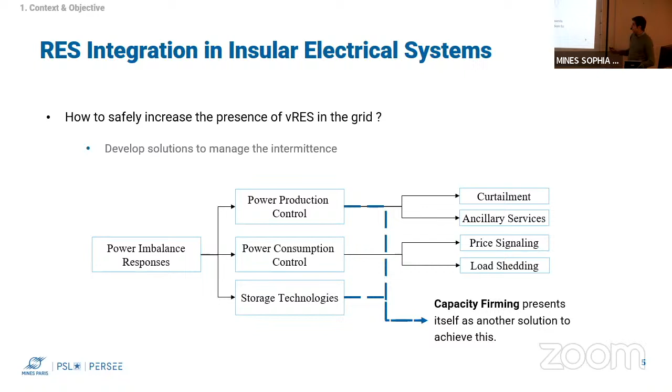One specific solution of interest in this work is a combination between power production control and storage technologies, which is capacity firming. Capacity firming is when we demand from a RES source a guaranteed power injection for specific periods of time.

And to do that, what classically is done is to use energy storage systems. When we talk about energy storage systems for capacity firming, what we saw is that lithium-ion technologies are particularly well adapted to this application, as they have a very fast response that can work well with the intermittence of renewable sources. It is easy to scale up or down to meet the specific physical configuration of the power plant on site. And also its pricing has been decreasing steadily and is expected to continue to decrease in the future.

So what this has done is that in capacity firming solutions, the lithium-ion based energy storage system have become the common choice to satisfy the energy storage needs of these sites.

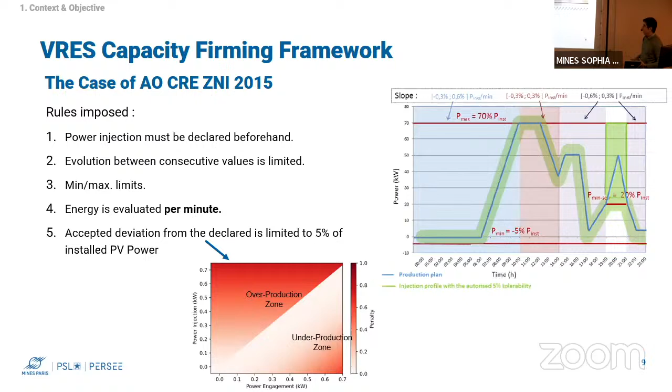And so we see that this capacity framework is a complex system, and this complex system needs to be approached in a coordinated manner to offer a system that is fully functional and that answers the needs of this capacity framework. So we can distinguish different steps that need to be considered when answering to a capacity framework.

Which are: we need to consider solar forecasting, we need to also be able to model the system and the behavior of the different production systems, we need to be able to generate the engagement that the central power has to make, and afterwards we also need to make sure that we operate the system in a manner that is coherent with the declaration done before, so we can optimize the operation.

And we see that in each one of these steps that needs to be taken into account, there are technical challenges that can be addressed and that can help optimize and improve the general behavior of the system. Particularly in this work, what we focused on was the modeling of the energy storage system. And afterwards, what we focused on after the modeling was the impact these models had on both the optimal engagement and the optimal operation of the plants operating under this capacity framework.

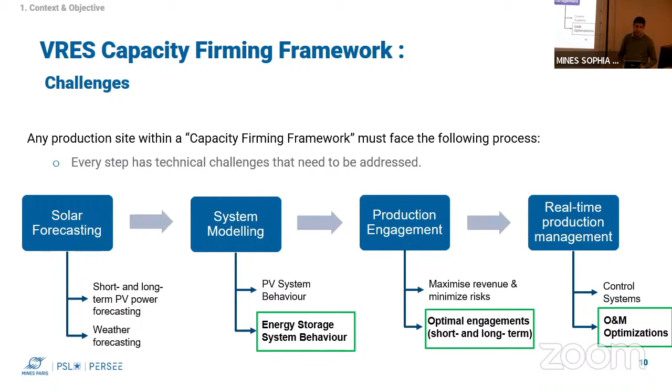So when we focus on the energy storage system behavior, what we saw in the literature was that there were no real models and data focused on industrial environments, and that mostly all the models were developed on laboratory conditions. Secondly, these models and approaches that were available are most often done for single battery cells and battery packs with small capacities. And the case of whole systems and large scale capacities is not fully addressed in the literature.

And at last, another point that was noted was that there is no real knowledge and information on how a specific power application will impact the behavior and performance of the BESS over time. So having this in mind, we proposed an objective to develop a BESS model that was compliant with industrial constraints and that allows the optimization of storage operation for photovoltaic capacity frameworks.

Here, when we talk about the industrial constraints, what we mean is that there's an environment of data scarcity when there is no laboratory testing done, and that the measurements are very dependent on the specific BESS manufacturer and the data that is available, and also that the models need to be compliant with the embedded systems and the needs of industrial sites, so it can be easily adapted and introduced in such systems.

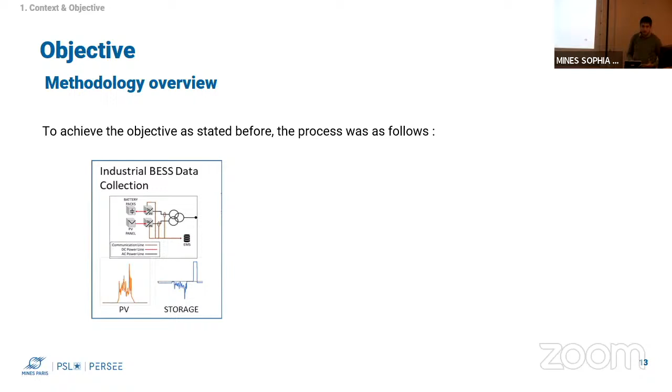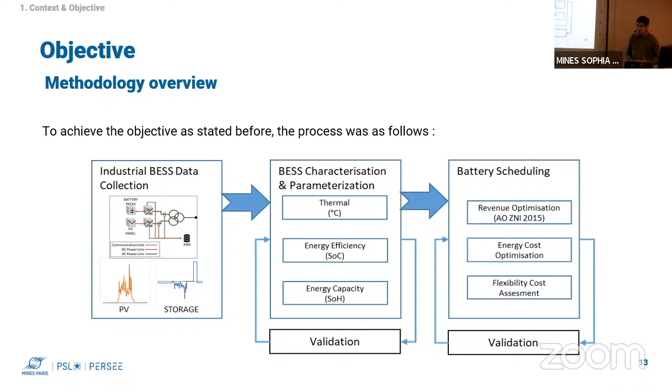To achieve this objective, the methodology followed here was to build several industrial BESS data system collections. Afterwards, with the data collected, we developed a model that estimates several internal states. And with the internal states and the model done, we applied such models in battery scheduling applications, and in particular in optimization frameworks to determine the best usage of the energy storage.

So now let me present the experimental industrial sites that we worked upon. In this work, we built 5 hybrid PV power plants that were developed under the capacity firming framework that I presented just before. This started with one proof of concept site in the SPIE facility in continental France.

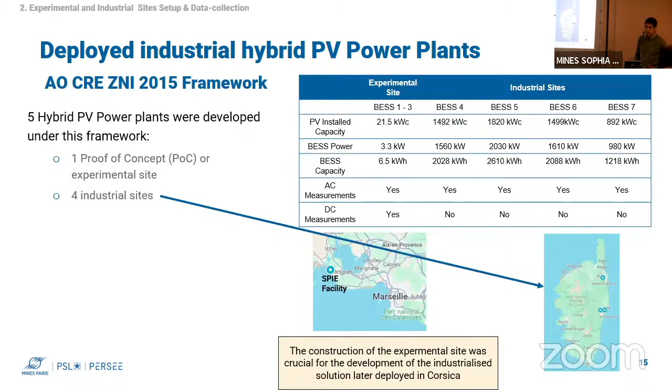Once the site was built and the operation was validated, an industrialization of the system was done and deployed in the island of Corsica for our client. What we obtained from these sites at the end were seven BESS that were in operation, from which we can distinguish two different kinds of measurements and two different types of BESS.

The type from the experimental site, which is more open in the data available of the battery, and the type seen on the industrial sites, which was a more closed environment and for which measurements are hard to obtain.

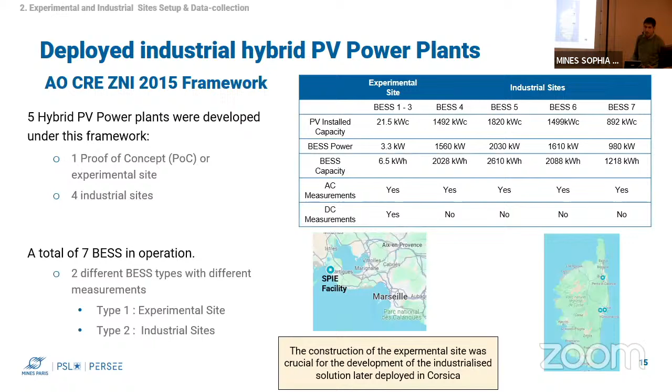When we focus also on the specific behavior that the energy storage system has, we saw that when operating under this capacity firming framework, the energy storage has a very specific type of charge and discharge profile. Given the rules of operation, the energy storage is mostly charged during the day when there's photovoltaic overproduction, and then it is discharged in an almost constant way between 7 p.m. and 9 p.m.

So what this does is that the system will have a very recurrent charge and discharge profile that will be charged during the day and discharged during the night, every day, during the whole life of the project. So we see that the BESS will always experience the same type of profile.

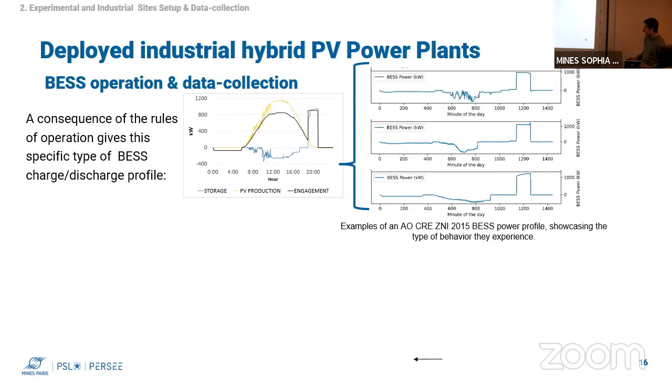The data that we collected from this BESS was heterogeneous from site to site, given that there was often data loss due to malfunctions, and the acquisition systems that are deployed are less reliable in gathering all the information and saving it for later use.

What we obtained was 1.5 years of data from the BESS from the 5 sites, in which we collected the behavior and the different data that was available.

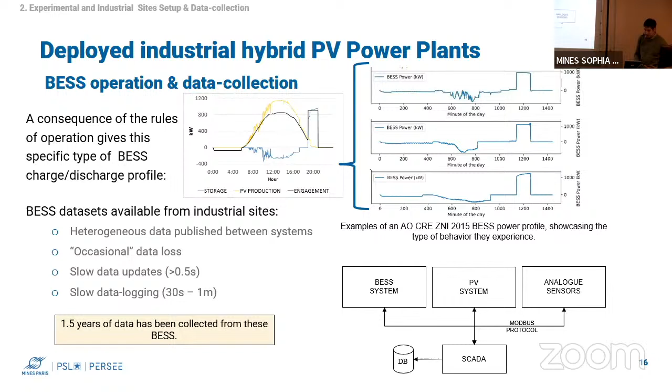Focusing also on the observability that we had on the BESS, the two BESS types have different real-time values that can be exploited. The experimental site offers AC measurements, DC measurements, and internal temperature, in addition to indicators of state of charge and state of health. However, the industrial site only offered AC power and state of charge and state of health.

So that was a difference in data. However, what we saw also is that for both systems, the manufacturer provides characteristics of the energy capacity available at the beginning of life and the charge and discharge efficiency coefficients, which in general is what we consider the manufacturer-issued model, as this information is what's used in pre-project development and study phases.

Another interesting detail was that the capacity retention of the different BESS can be guaranteed by the manufacturer, but it's also not a standard, not a requirement. So what we found is that the industrial site did have a warranty, but the experimental site did not have any reference value for capacity over time.

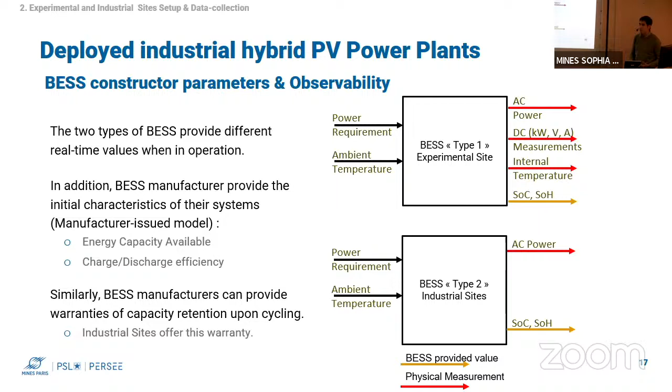After gaining a notion of the data we were able to collect, we focused on battery model development. Here the objective was to develop a BESS model that answers the needs of photovoltaic capacity firming sites, and that is able to be integrated into the energy management system and the power management system.

Here, we found several questions about the impact that temperature can have on battery performance, and how models developed for single cells and battery packs can be adapted and used on large-scale systems that are data scarce and lack a lot of information on their behavior.

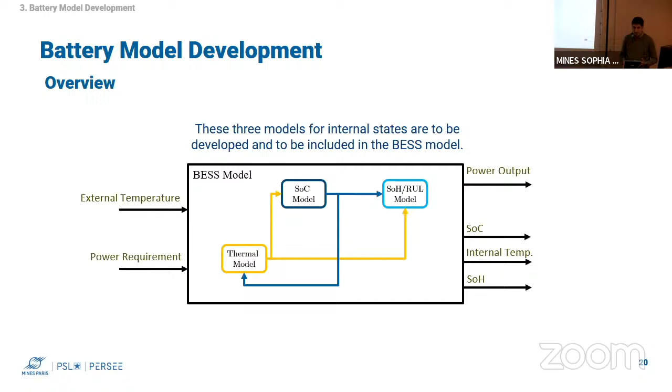So what we wanted to do for this was create a BESS model that estimated 3 internal states: the thermal model, the state of charge, and the state of health. By determining each one of these, we could have a BESS model that showed the interdependence of the elements. Starting with the thermal model development, the first thing we did was observe the thermal behavior that the storage had when operating under the capacity firming framework of interest.

What we saw is that the temperature of the BESS showed 5 different zones of temperature reactions. The first observation is that at the beginning of the day there's a temperature decrease that is linked to the heat exchange with the environment.

Afterwards, during the middle of the day, we see an increase in temperature related to the increase in ambient temperature, the exchange with the environment, and the fact that the batteries start to be charged. After that, at night, we start the moment of a strong discharge, so what we see is an increase in temperature. We also see a small decrease in temperature in the middle of this discharge, which is linked to endothermic reactions that happen inside the battery.

But this phenomenon is quickly overridden by the ohmic effect and the power that is coming from the battery. From here, what we concluded from this behavior was that the main factors to determine the internal temperature of the BESS are both the ohmic heat linked to the power coming from the system and the external temperature due to external exchanges.

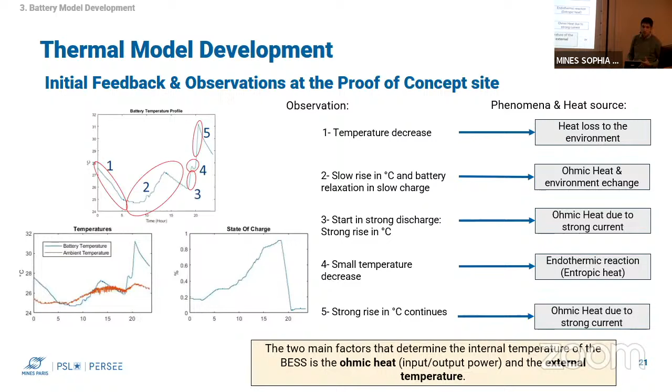With this in mind, we approached the thermal modeling, and what we did is determine the internal heat sources, which are the Joule effect, that is the ohmic heat, as we saw before, that is dependent on the state of charge, and the entropy changes, which we saw have an impact, but a very small one. We also saw the external heat sources, which are the convection and the thermal radiation.

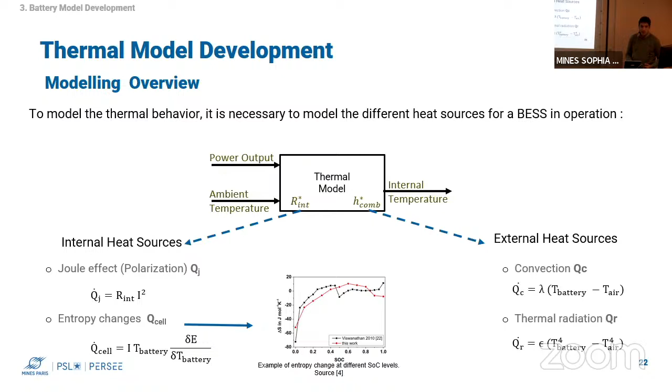These heat sources we parameterized and included as 2 parameters: an internal resistance value and a heat exchange value H, which we use to determine a thermal equation of the battery system.

So with this equation and the data, we estimated the parameters for the BESS studied, and what we found is that the resulting model was able to predict the temperature of the BESS within 2 degrees Celsius during the day, at any moment. This gives us a notion of the internal temperature the BESS is going to have, given the profiles and the specific usage we foresee for one day.

Additionally, we also focused on the maximal temperature prediction that we can achieve through this model, given that the temperature can be an indicator to see if we are near a zone of temperatures in which there are some safety concerns for the battery.

So what we did is use the intraday estimation, and we saw the maximal value that it predicted, and in that case we had a 1.2 degrees error. Another technique we used was the scheduled production expected from the battery, and via machine learning techniques we determined the estimated maximal temperature, and in this case we got an error of less than 1 degree for the maximal temperature.

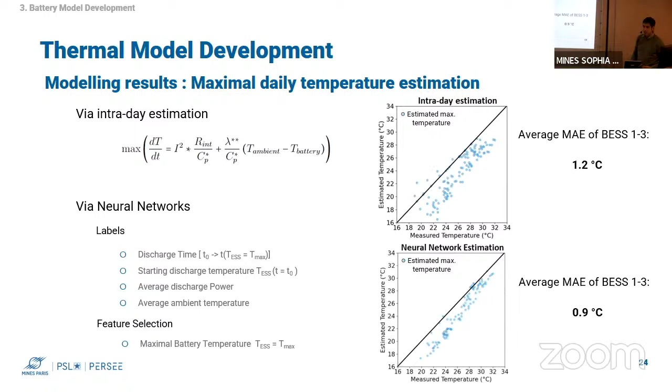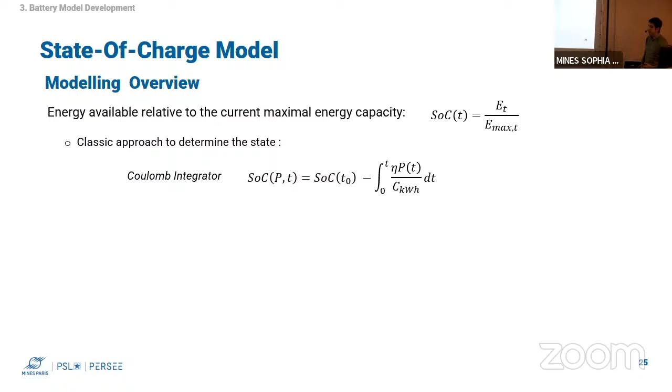So after the thermal model, we approached the state of charge model. In this case, the state of charge is the energy available relative to the current maximal energy capacity. The classical way to determine it is through the Coulomb integrator approach, here written in power form. This means we can calculate a model of the state of charge with just determining one parameter, which is an efficiency coefficient.

This efficiency coefficient is traditionally what the constructor gives about their energy storage, so it is what we call the manufacturer's SOC model, when we use the efficiency coefficient furnished by the manufacturer. However, what we saw is that this simple model is not able to answer the most complex behavior that the state of charge can have for a battery, such as its thermal dependence.

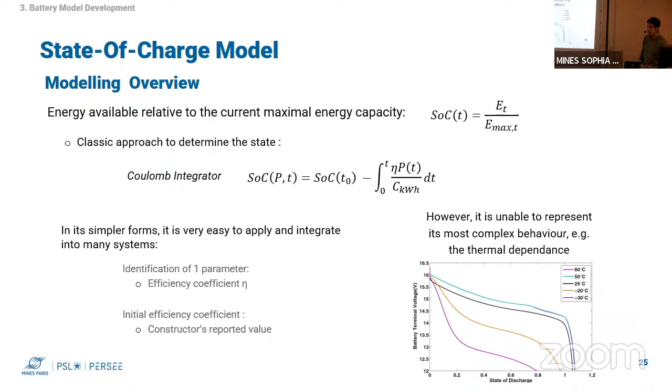So to alleviate that and incorporate this dependency, we did an improved approach that added a second parameter that is still dependent on the temperature.

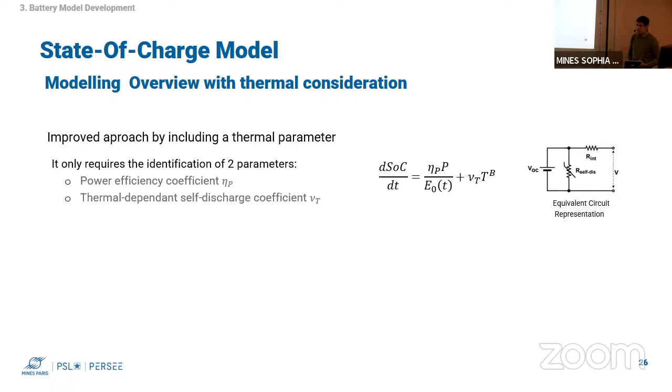By doing this, we can model part of the phenomena that is related to the internal temperature of the system, and it also allows us to coexist and co-estimate with the thermal model done before. So there are systems that can work in parallel and co-estimate one another.

When applying these models, when we parameterize them and see the results they give, we see that the average error for state of charge estimation was reduced from 8 to an average of 3% for all the systems. And when we use the improved approach with the thermal dependence, what we saw is a similar result to the one before, which is resilient. So we can include the thermal dependence, and we don't see a degradation in state of charge estimation.

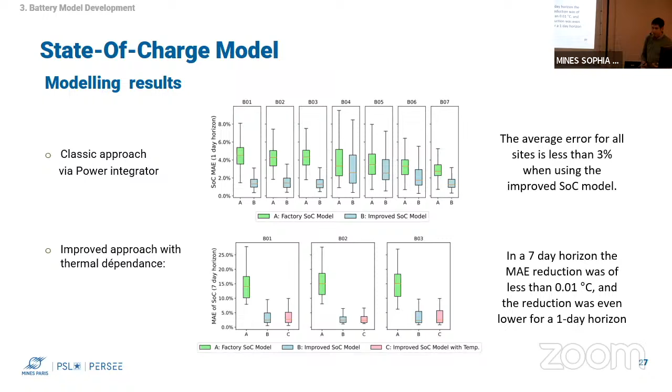So we see this state of charge estimation is better, and we tried to apply this model on the developed sites, in the 4 industrial sites that we built. We saw that by including this improved parameterized state of charge model, the average error of the state of charge during operation reduced to 4%. By association, the general operation of the site improved, and we saw a higher increase in revenue and a decrease in penalties. In general, this meant a revenue improvement between 1 and 2% per each of the sites in terms of penalty.

At last, we attack the problem of state of health modeling. The state of health is the maximal energy capacity the system can hold at the moment, relative to the initial maximal capacity. So if a system had a 100 kilowatt hour initial capacity, and now it can only hold 80, that means its state of health is only 80%.

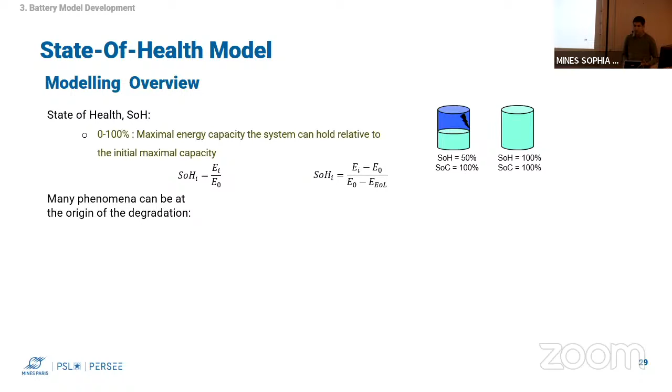When we study the state of health modeling, what we saw is that there are many phenomena that can be at the origin of this degradation, and most of them are very chemistry related to the system. So what we also saw is that, given it's very dependent on the chemistry of the system, the behavior will change given the specific chemistry that is subject of the study.

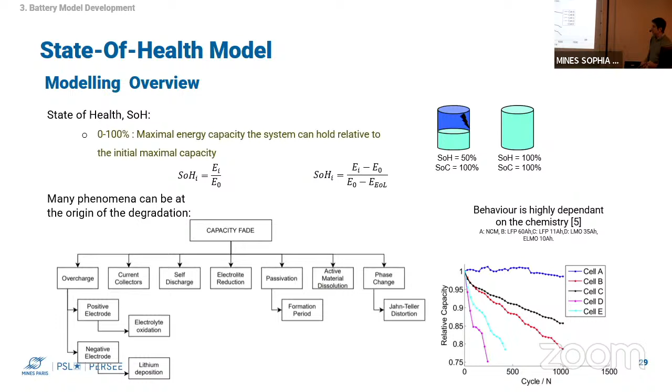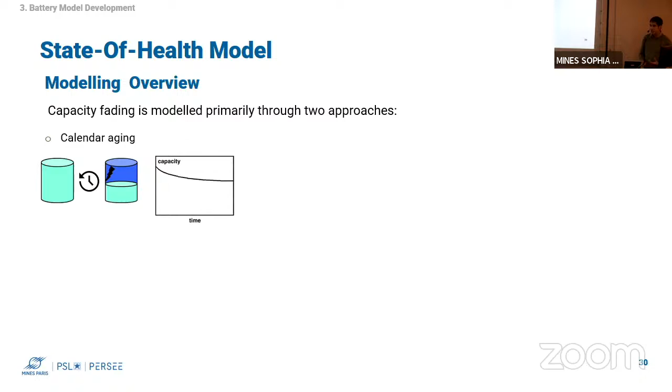When we want to model the state of health, there are classically two approaches. One is calendar aging, which is just the degradation that happens when the battery stays still, and cyclical aging, which happens as we are using the battery to charge and discharge and furnish power.

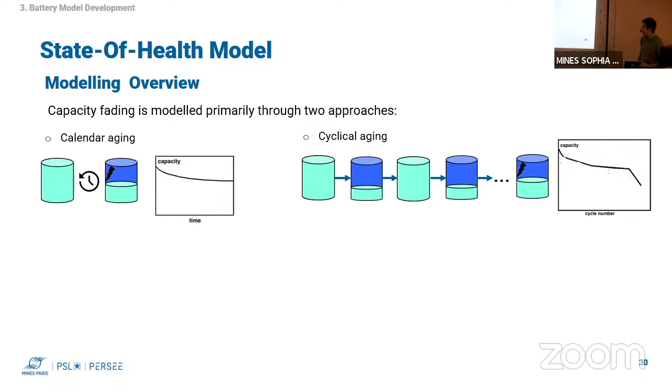What we did is use a model that includes these two phenomena within 3 parameters. One is the formation of a solid electrolyte interphase on the battery, which is a layer that degrades performance, and 2 parameters, beta and F, which encapsulate the degradation that the system has due to calendar aging and cyclical aging.

We can do this in a simple manner, because as we saw before, the behavior of the storage and the power profiles we have is very recurrent, and also expected to be on a daily basis. So we know that the calendar aging is implicit in the cycle degradation.

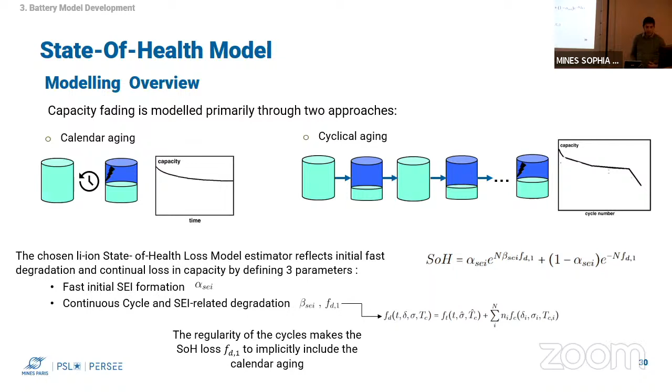One of the feedbacks that we saw from the industrial sites was that the energy available from the deployed sites was higher than the guaranteed value. So we needed a model that was able to reflect this different behavior.

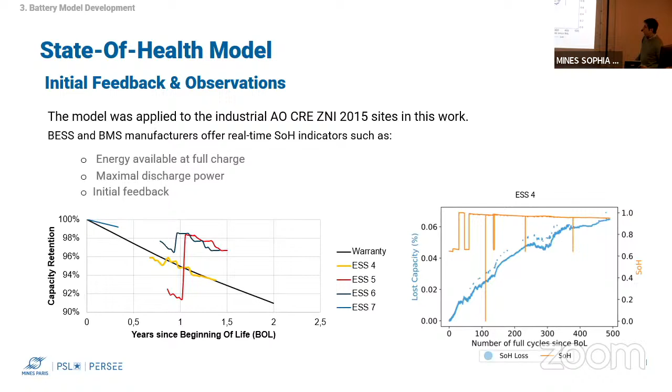When we parameterized the state of health model for each of the energy systems, what we found was a net reduction of the error when predicting the state of health of the battery. In general, what we saw was that the warranty provided by the BESS manufacturer was very pessimistic, and is not well adapted to the application we have in hand, as the BESS capacity firming framework, with this kind of usage, degrades the system less.

So once we had the three models, we could join all three into the BESS model we wanted, in which we can estimate each of the internal parameters individually, and if required, co-estimate them and make them interplay, to obtain a generalized BESS model that can be integrated into the system, given the information available for each site.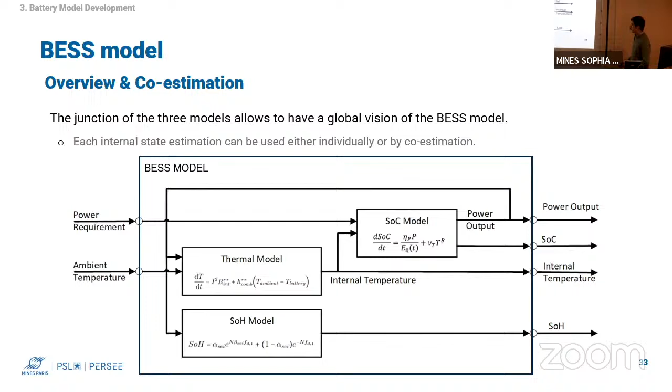To summarize what we did on the battery model development, we proposed a temperature estimation model that is able to predict, within 2 degrees Celsius, the temperature of the energy storage, which gives a real indication of the temperature at which the system is going to operate.

We also propose an SOC model that can be trained only with the AC power and the state of charge indicator that is furnished by the BESS.

And also we saw that the BESS degradation from the PV capacity firming framework of interest is less aggressive to the energy storage system than the warranted values, and thus we can foresee that the system will operate for longer than the initial study or prevision could have foreseen.

And afterwards, once we had the models, we approached the problem of how to use them, and for that we had an objective of building an optimization framework for both photovoltaic and BESS hybrid power plants that allows us to integrate the different BESS models and study the impact that these improved models have when compared to the factory issued values.

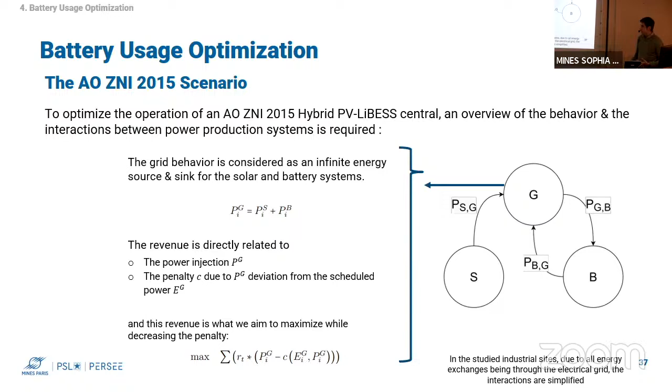So what we wanted to do was to be in coherence with the capacity framework. We wanted to increase the power injection and minimize this power injection in coherence with a previously scheduled power engagement. And what this does is we get an objective function for the optimization problem that maximizes the power injection and minimizes the cost of the difference between the two.

For the solar behavior, what we did is we suppose that it can have one of three different behaviors, which are classical solar inputs: one that is very smooth and high energy, one that is a lot of the same and similar in energy but with a lot of variability, and one that provides not a lot of solar resource and a lot of variability.

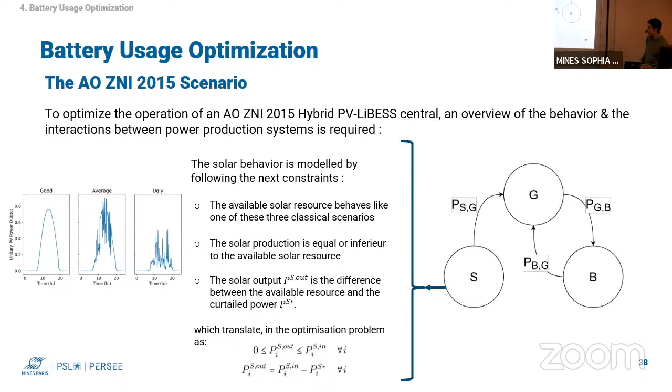And from this, we suppose that this could be the input of the solar system, but we also allowed for the fact of photovoltaic curtailment, so we could actually use less of the solar energy than the available resource, which translates to these two optimization constraints.

And at last, for the energy storage system, we wanted to constrain it, of course, to its physical limits in power and in energy. And to do that, we defined the physical limits of the system, but we also included a state of charge and a temperature model for which the specific function can be adapted depending on the model that we want to integrate.

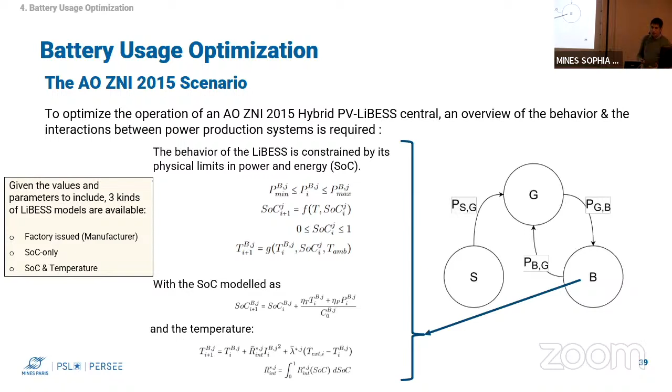And in this, when including the models, what we can see is that by changing the parameters that are available in this model, we can either include the factory issued model, we can include the state of charge model that we propose, and we can also include the state of charge model with the thermal temperature dependence that we worked upon. So this allows us to integrate any of these three models into the optimization framework.

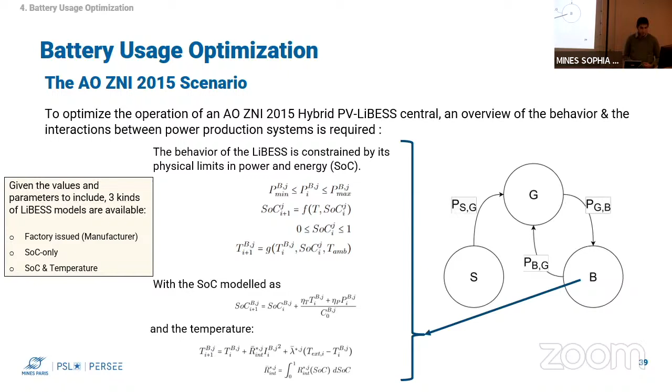So once we established the basis of the optimization framework, what we saw is that we got two different optimal optimizations that we can do for the PV capacity framework.

We can either determine the optimal engagement, for which we can see the different constraints that we spoke before, and in which, given a possible PV forecast, we determine the best engagement that the system can do. Or we can optimize the production, in which the engagement is considered as an input of the system, so the optimization problem is simpler, and in this case we obtain the best possible outcome given the previous engagement and the real photovoltaic production that can be done.

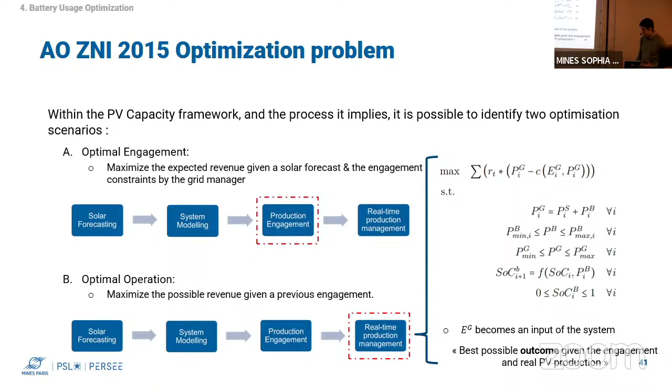So once we have these two scenarios of optimizations, what we did is we run the process. We use a solar forecasting, we introduce the system modeling, we determine the best production engagement, and then we studied the impact.

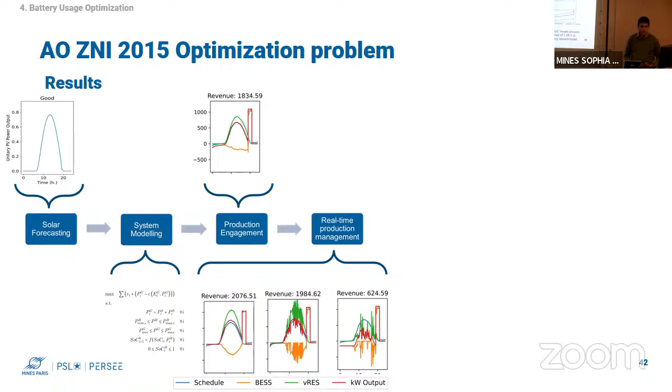We optimize the operation given the engagement. Generally, what we found is that by introducing our proposed SOC model, the revenue estimation for the optimal operation decreased almost systematically for the four systems. What this tells us is that if we use the manufacturer issued BESS model, we're going to have results that are higher possible revenue, but these are revenues that are going to be impossible to attain.

So by using our proposed SOC model, we get less revenue, but there are realistic outcomes for the system.

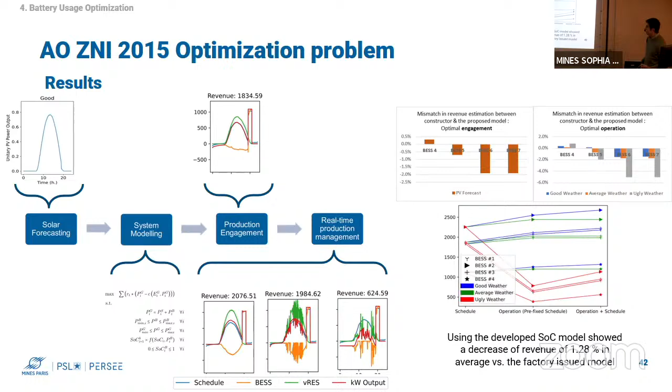Using the same base of this optimization framework, we also treated the subject of a microgrid scenario with a low voltage network. Similar to the one before, we had a battery system, but now instead of one BESS, we talk about 3 individually controllable BESS. This adds extra complexity to the problem and adds a battery aggregation problem into the mix in this optimization framework.

Secondly, we define a local load that is now the objective. The objective function is what the optimization problem needs to be able to supply. As a consequence, since there's a local load to satisfy, the electrical grid is still an infinite energy source and sink, but no longer incentivizes injection, and instead it is penalized. Because the grid is a separate element, we could determine a specific injection at any moment, or we could require a specific injection, which adds a flexibility requirement to the operation of this microgrid.

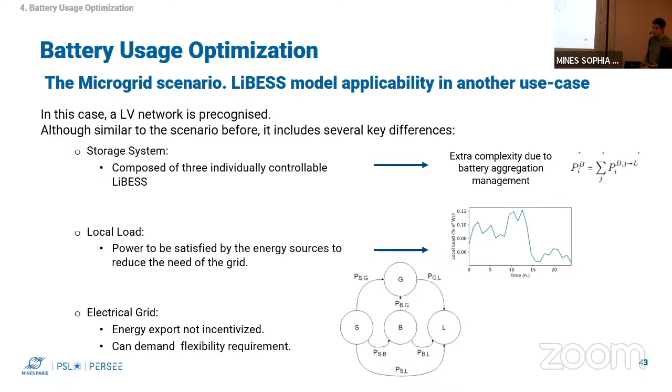When we did the microgrid scenario, the results without any flexibility requirement showed that, using the improved models, just as in the case of the capacity firming framework, the cost of energy to satisfy the local load increased in both cases, with and without the thermal dependency and the state of charge model.

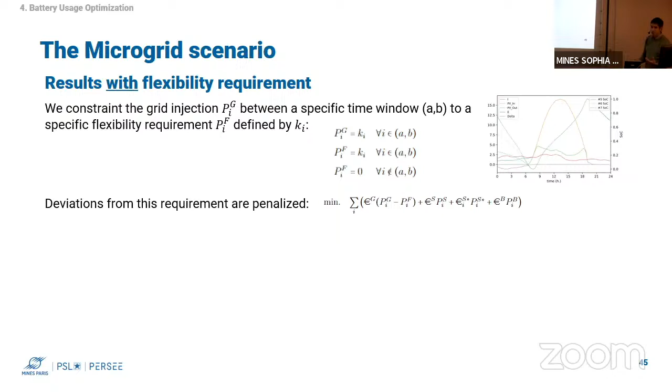Also, when we included the flexibility requirement of a specific power injection for a period of time, and included the deviation from this requirement as a penalty, we saw that adding the improved SOC model with thermal dependence increased the overall cost by 2%, reaching up to 10% globally when considering flexibility for a system.

In this case, what we saw is that the thermal consideration does not significantly change the cost to satisfy the flexibility requirements, so it has a minor role.

Another insight from this part was that the degradation expected from the 3 BESS when using the improved SOC model is less than when using the manufacturer model. However, this decrease in degradation does not compensate for the 2% increase in total energy cost to satisfy this grid.

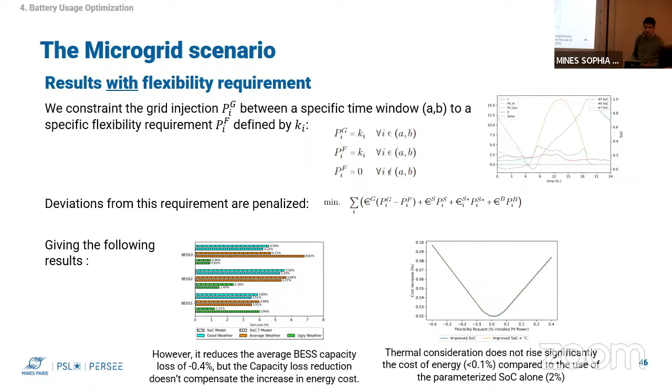In conclusion, what we saw in this optimization framework, in summary, was that we propose an optimal scheduling and operation optimization framework specific for the PV capacity firming of interest, and that the proposed SOC model showed, in general, a worse expected revenue, but one which is more realistic, which can help better determine the financial results of newer projects.

Also in the microgrid scenario, we included 3 BESS to satisfy a local load, and we saw that just as in the case before, the inclusion of the proposed SOC models increased the overall cost of running a grid.

To summarize the conclusions and perspectives of this thesis, what we did was develop a LiBESS model that, given data sets from real in-situ industrial sites, we adapted the BSS models to this data, so it is ready to be applied in other similar industrial sites.

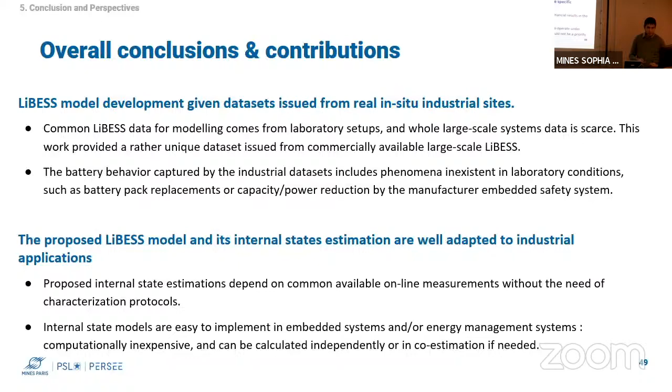We also integrated the BSS models developed before into the capacity firming and microgrid optimization frameworks to evaluate their results, showing generally how using only the manufacturer model can lead to erroneous assumptions of revenue. Finally, we also evaluated the benefits of the state of charge and thermal component co-estimation.

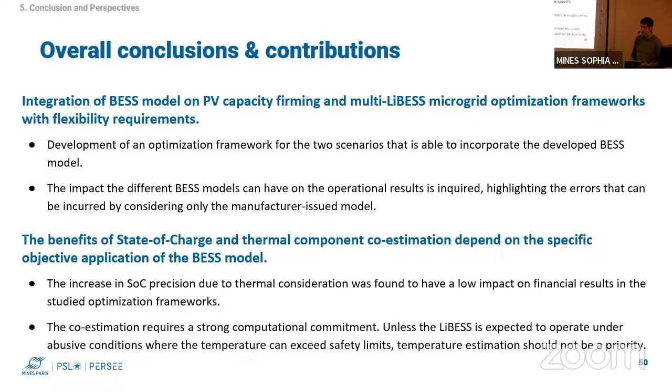This benefit can be very subtle, and depends a lot on the application, on whether this increase in co-estimation and temperature value is required. Regarding perspectives for future work, with all we've seen, there are clues to determine the different use cases and application scenarios in which the inclusion of the thermal component can have a more important impact on the operation of the system.

And so research on these scenarios that benefit from this can be of interest. We could also foresee a clue for the state of health modeling, in which we include seasonal capacity loss due to ambient temperature, relative capacity loss that is reported as loss, but given that when temperature rises, it will be recovered.

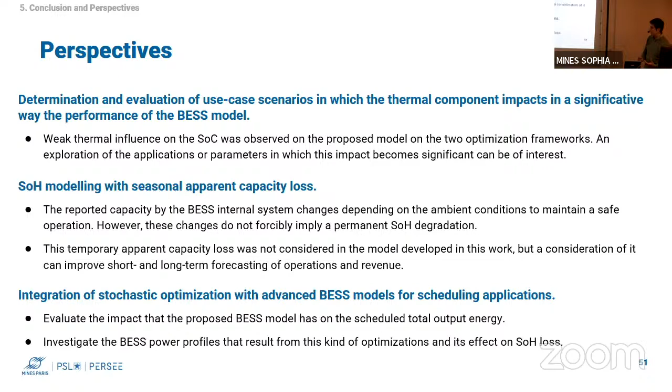We can also foresee the integration of the BSS models into optimization and stochastic optimization paradigms, so that we can evaluate how these models impact the optimal operation given the variability of the production. And also we can envision some works on the integration of capacity degradation onto the optimization problem itself. In this work, it was more an observed variable, but we could foresee optimization problems that are aware of this degradation and optimize accordingly.

And at last, we could also see how these works could finish onto studies to determine the best capacity and the best BSS to apply, depending on the geographical locations and the external temperatures that are expected on such sites.

Thank you very much.

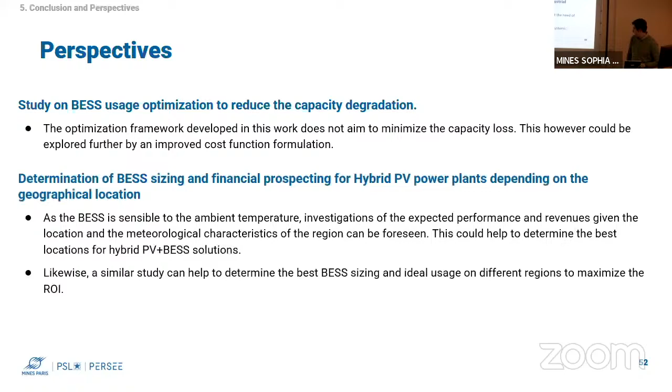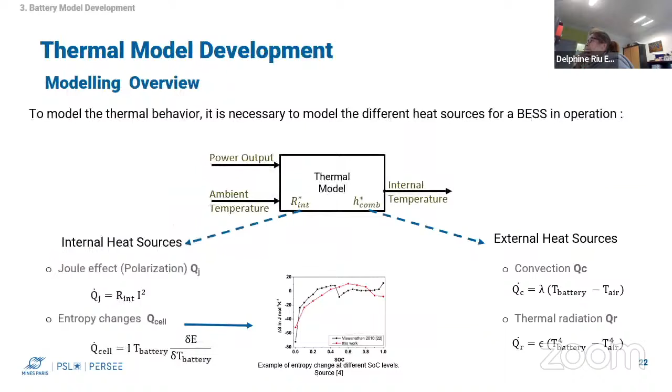You have observed a deviation of the estimation with time, which seems to be normal. I wonder if you have taken into account making a recalibration of the model according to time. Do you think it would be interesting to make another estimation according to time? You observe a deviation with time - maybe, as for the SOC which is also an estimation, you could stop the system, make a measurement, and recalibrate the model according to time.

I'm not sure to be... Yes, the idea of the models was to reach a point where the online measurements are enough to recalibrate and have a general idea of this. For the thermal model, it's not something we aim to do because we saw that for industrial systems, it was something that did not apply. So no further attention was given to recalibrate.

However, as you said, there are parameters that evolve - the internal resistance increases with time as the battery starts to degrade. We can expect these models to evolve and generate more heat with time, so there can be an interest in doing that. So far for this capacity firming framework, it wasn't a priority because we saw that the expected operation falls largely within the safety zones, so there is no really particular question that arises in terms of safety of operating in very hot conditions.

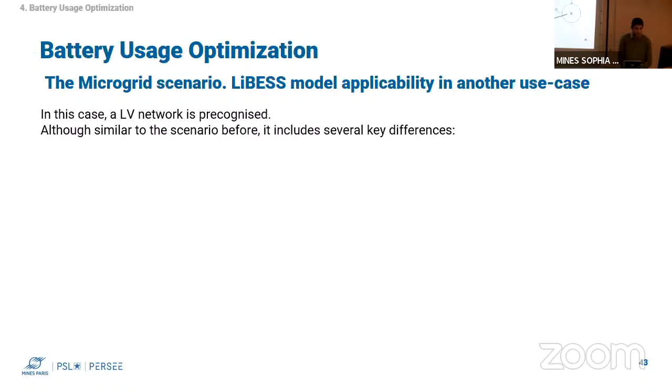Sorry. I'm not sure after reading your document and seeing the same slides, to understand finally the key reason why the manufacturer data are less optimistic than your own measurements. What is the key point for you, for which you are more optimistic than the manufacturer data? Because classically, in my own research work, we have observed exactly the contrary. So what was the question? Sorry, I lost it. Do you try, for instance, to discuss with the battery manufacturer to understand this?

No, we did not have a direct exchange with the manufacturer. What we saw is that generally speaking, our state of charge models showed that the performance expected from the BESS was less than the expected performance that the manufacturer had. Is it that you have the exact contrary results in your research? Did I understand that correctly?

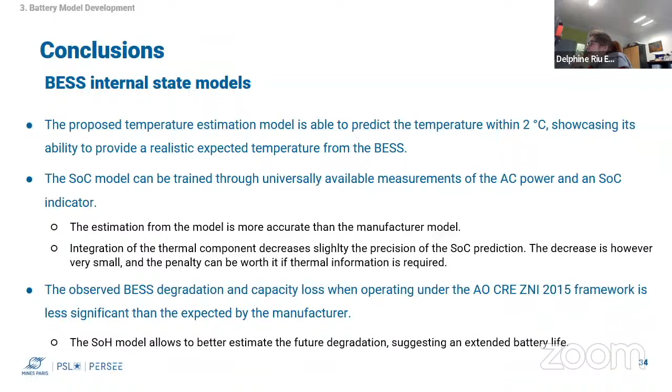Okay, so my interpretation is that the model from the company is less optimistic than yours. Oh yes indeed, yes, I'm so sorry, I got confused. Yes, exactly, what we found was that the warranty of the manufacturer was less optimistic than the real behavior of the system. Afterwards, we also rationalized this in the sense that due to the warranty having financial impacts, the manufacturer has an interest in being pessimistic on their warranties, as otherwise they can be financially penalized by the constructors. But yes, what we found is that in any case, under our specific scenario of usage, the degradation is less than expected.

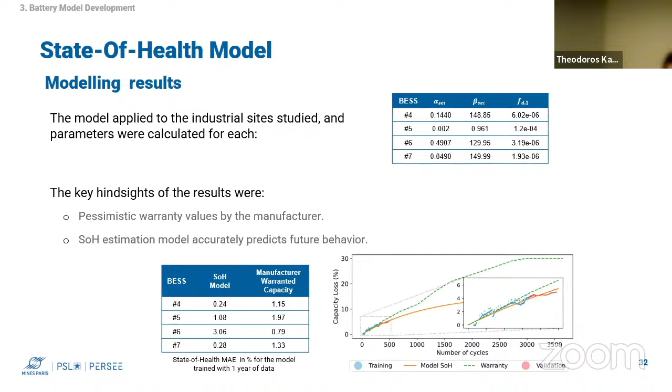Yes, so the storage solutions deployed on sites were of this kind, mostly because they were not chosen by us specifically. We just invited the developer to use them, because the energy system, the EMS and PMS to be deployed at the moment of the case study and project development, there wasn't still a lot of feedback on how to properly manage and control these systems. What we found is that this kind of solution, lithium-based, allowed the flexibility and control requirements needed for the system, so it was very focused on the power control capabilities these systems have.

Okay, so did you also explore other types of solutions, or did you start your research by taking lithium-ion batteries as the application to use? No, we did not explore the usage of other batteries, given that this technical solution was already foreseen. We started directly based on this kind of solution, but the evaluation of other energy storage technologies was not explicitly considered.

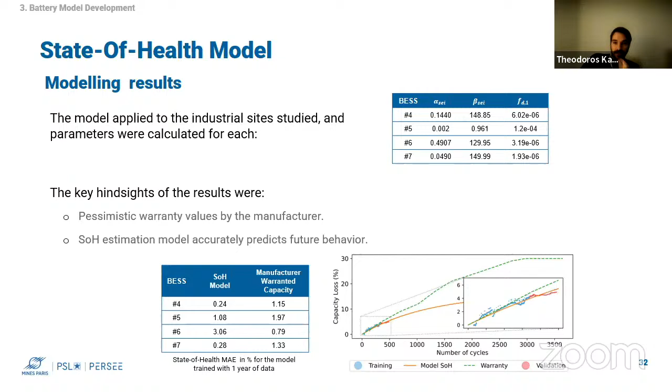Yeah, I have some questions about the model. This is the temperature that was validated over the period of three days. Did you also incorporate the aging model to predict the temperature over lifetime?

On the lifetime, no, we did not explore the temperature model on the lifetime of the battery. We just evaluated the temperature and the estimation we can have on a continuous day operation. But the lifetime was not evaluated, although we could indeed try to explore this increase of degradation due to temperature on the lifetime of the system, which could be of interest.

Yeah, I think it could be a nice parameter to include, because I see that you have an internal resistance of some 100 nano-ohms. Is this the internal resistance of the battery or of the module, or how do you define this internal resistance?

Yes, okay, this is internal, but not based on these batteries. We did not have laboratory measurements, and we did not have any experimental data. So this internal resistance is the internal resistance of the thermal model for the heat generation, and what we do is determine it through the parameterization of the system, but there is no measurement of the internal resistance.

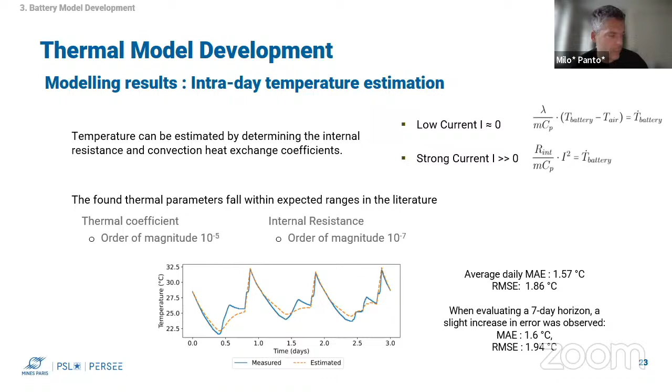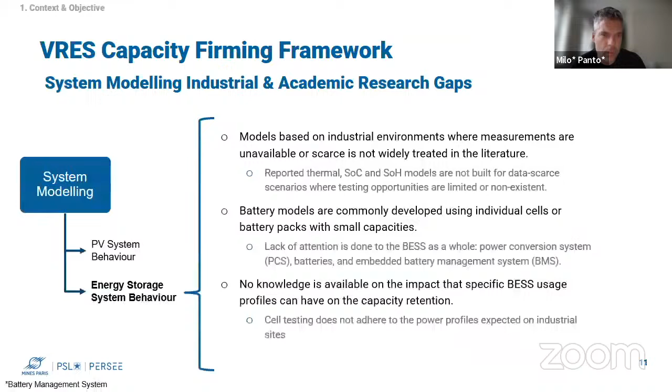This one, yes. So we can see here that we're talking about 1 day. So we have to make our forecast for the next day, if I understand correctly. Yes.

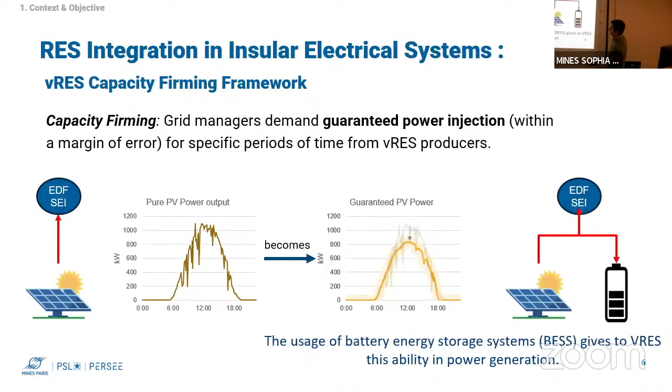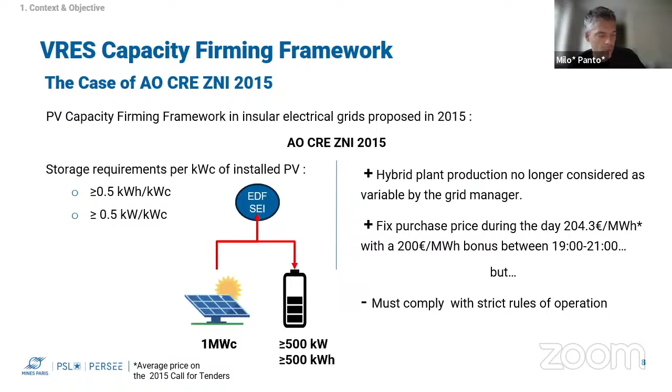In this capacity, the 2015 capacity firming framework, for the island Corsica, it was a requirement. Yeah, and there is on page 10 and 36, you are talking about long-term management. So my question is, do we really need a long-term management in this problem, since we are talking about capacity firming where the next day is considered, the next 24 hours, which is short-term. So where do you use your long-term management? Because obviously it's not used in the capacity firming, if I understand correctly.

You can make some comments on this. Yes, indeed. On the day-to-day operation, there is no notion of long term. The long term management comes when we start to evaluate the capacity degradation that is expected on the optimal operation throughout the life of the sites. So at the beginning, given the operation of the system, the warranty and the manufacturer, we can foresee a 10-year scenario. However, when we start to include our models into this capacity framework and the optimization scenario, we can start to see that the expected degradation is less or more, and therefore we can also start to adapt our behavior to that.

Okay, thank you. What about, here we are using the battery for the capacity firming. What about usage of the battery for voltage control? Because we know that our photovoltaic power plants can also increase the voltage at some point in the system. So did you think about this one also or not?